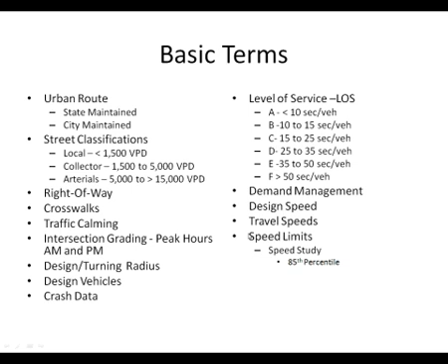You can see a couple of nighttime crashes, a side swipe, and then just rear-end accidents. We look at the predominance of how many accidents we have, what kind of accidents, and then look if there's anything we need to do to this intersection - signals, stop signs, roundabouts, anything along those lines - to try and help reduce the number of crashes and make it safer.

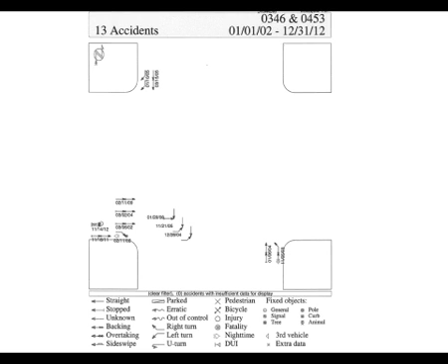This one, we did have a complaint about pedestrian safety. We look at it, there's actually no pedestrian accidents, so we have a hard time saying this is a really dangerous intersection. It may be. We are going to monitor it and see if there are issues out there, but this is the data that's presented to us. This is just a blow up.

If anyone couldn't see that slide before, you're looking at some in 2005, 2004, 2003 - we had a lot of them. And then from then on until 2008, 9, 11, and 12, we only had one each year. So either we did something to the intersection, or we'll have to evaluate it because there was a drop-off, and see why we had that drop-off in the year.

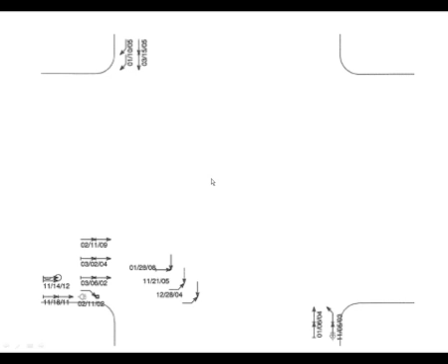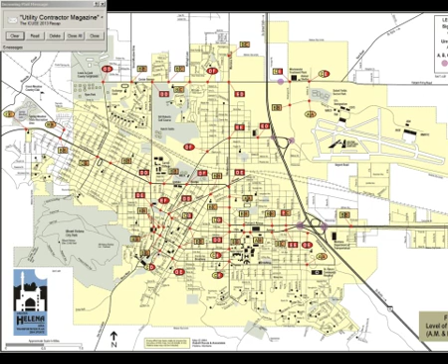This is on the slide - this is the Greater Helena Transportation Plan that I'll talk more about, but this just gives an idea. We have all the intersections, or major intersections, graded to see our overall transportation system. If you're starting to see E's and F's and D's, that means there's over-congestion. We need to do something, because the worse off the intersection is, the more crashes you're going to have, and you're going to have pedestrian problems - you can really have some dangerous intersections when it breaks down. So just looking at, you have the AM peak and the PM peak, that gives an idea of what we're looking at.

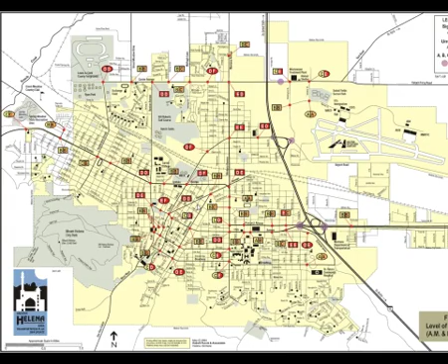One thing that causes a lot of confusion - and the more I'm talking, I want to try and make it as easy and concise as possible so you can get your point across without confusion or wasting time, or getting frustrated because they don't understand what you're trying to portray. So some differences that can cause problems are maintenance and reconstruction.

It's different in MDT versus city or county - I'll go through that. You have studies and design plans. There isn't much confusion on that, but it's more of a timing issue, and timing is a big deal.

Then you have to know about sidewalks, multi-use paths, bike lanes, share the road. Typically when transportation engineers look at it, if there's a multi-use path that's a bike path for pedestrians, we tend not to want bike lanes associated with it because bicyclists can travel on the path.

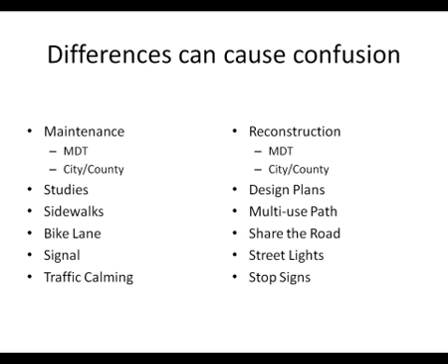We have specific engineering structures we can put out there that will physically make people uncomfortable, which tends to either give more prominence to a pedestrian so they can be seen easier and traffic can calm down, or actually make drivers slow down and change direction.

At this point, that's just a rough overview of what we look at for transportation engineering terms. Is there any questions, or should I go back or do a little more? Any questions that anyone has?

So Ryan, we can go ahead and start with a couple of questions that popped up on the chat window. One question was, can demand management also include biking and walking as well as modes of getting people out of their cars and into different modes of travel?

Oh certainly, yes, that's one that we look at - if we can get people to walk, ride public transportation, or bicycle and commute, that's a huge portion of what we're looking at as far as demand management. If we can get a large enough number off the street and onto walking or biking, that street is going to be viable longer and not break down, so we won't have to do so much reconstruction, and maintenance is prolonged because you don't have the pounding needed from vehicles that keep coming. That is a huge portion, and something we strive to do is get people out of their vehicles just to help with the intersection itself. That's a very large portion of the demand management.

Great, one more question that popped up about level of service, specifically pedestrian and cyclist levels of service. Can you explain, is a pedestrian or cyclist standard equivalent to the automobile measure of level of service?

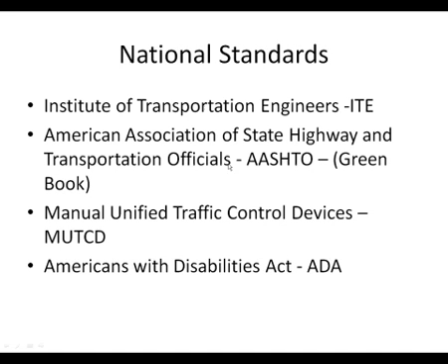So those are set in standard, set in concrete. Those you have to comply with, and they basically trump everything else — stormwater runoff, street trees — ADA is the big overwhelming design standard that is out there.

Then you look into the city, we have some regulations, we have the subdivision regulations. This is one that happened: we had a huge change in the subdivision regulations, not brought forward by staff, but by different organizations that went through our non-motorized committee, the Helena Citizens Council, and then directly to the commission to get sidewalks installed when the streets go in for new subdivisions, not with the building permit as was previously done.

They were waiting until the primary building was built, then they'd add the sidewalks. Well, a new subdivision can go years with the streets in but the lots and buildings not built, so you can have a lack of sidewalks. We had a lot of public comment, an hour in the public hearing on this particular item, and that got changed by the commission.

It's a way to get input. It was the right time to see a global change in when you want sidewalks in, not what type of sidewalk, but that went in with change when you had an organized group that came forward. So that's one where you have seen changes.

The engineering standards, we just updated them right before the subdivision regulations. We implemented complete streets. MTAC, the non-motorized committee, was very vocal in that. The city-county health department, they came in.

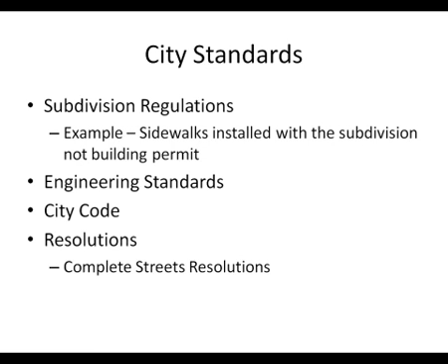We even have a complete streets checklist where you have to check it off - did you at least look at and justify all the different modes of transportation based on the classification of the road? You can use this in your own municipalities. This is where complete streets worked, and the commission was very happy - they can look at it and say okay, it was justified, it wasn't willy-nilly. We had a reason if we didn't incorporate a bike lane, narrower streets, or parking. We looked at everything, and if it doesn't go in, we justify it.

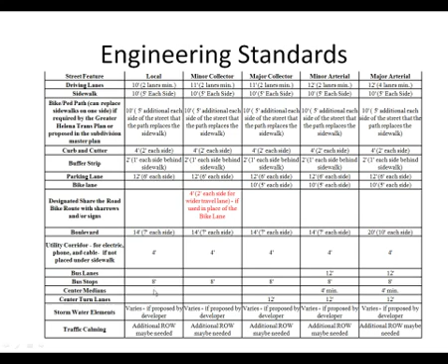This came up in the engineering standards that were proposed. Going through it quickly, staff proposed 10-foot lanes for local and minor arterials and collectors, a little wider based on emergency services input - they wanted 10 feet. Then this is what got adopted: groups came in and petitioned the commission, talked to them during public meetings, and got it changed a foot less - so 9-foot and 10-foot lanes instead of 10 and 11-foot lanes.

So there were a lot of changes, and then they have a deviation for on-street parking. The commission is very willing at this point to remove on-street parking to keep the streets narrower, reduce speeds, and pursue travel demand management by getting rid of some of the cars out there. If they don't have parking, make it better for bikers and walkers to help with demand management. That came in specifically with the engineering standards through public comment, with the commission, with city staff.

That's how you facilitate some of the changes that were out there, and staff is pretty much always willing to look at any of it. I can't speak for everyone, but everyone I've talked to is willing, if it comes in during the design standards process. If you came in and asked for a sidewalk or curb extensions at a particular intersection while we're doing engineering standards, great idea - we'll take it under consideration, but it's bad timing. It's hard to follow up when there isn't a specific project out there, and we're looking at getting public comment for a specific reason.

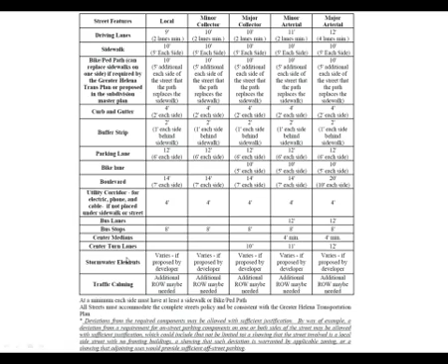Then we have the different studies you have to look at. This is the overall planning of the transportation plan - how you get the existing system to change, getting complete streets incorporated into the existing transportation network, through the Greater Helena Transportation Plan. Then if you want some specific needs, we'll look at some examples.

A neighborhood plan - neighborhoods get organized, saying our traffic's going too fast, we don't have sidewalks, we have pedestrian issues. We have a Winne group that got organized, looking at speed studies - what should we set the speed limit to? If someone comes in and says our traffic's going too fast in front of our house, the first thing we do is look at a speed study. Then we have some traffic plans - this is just in Helena.

Municipalities look at a specific region downtown and what improvements can happen in that area. We did have EPA come in and do a Greening America's Capitals program.

You can start to incorporate and use economics to get stormwater controls, to have better landscaping, to make it more accessible to pedestrians, less friendly to motorized vehicles, to get people out of cars, to get bicyclists to want to go downtown and interact more, and slow the speeds by making it uncomfortable for vehicles.

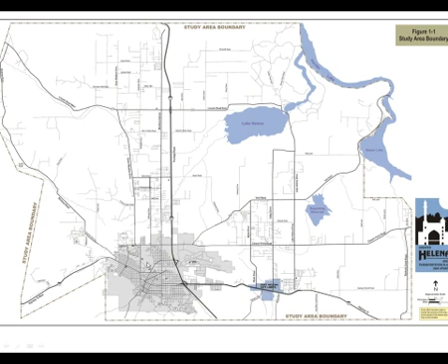The city of Helena is a minor part of it as far as the overall geographical area, but you have the majority of the traffic and everything within the city of Helena. Some of the things that have come in, we have actually adopted into the city of Helena. This is looking at the recommended improvements for vehicles.

The next slide will be the non-motorized section, but we've put in both the interchanges that are out there - this is the Custer interchange, this is the South Helena interchange. We don't have some of the connections in; we are looking at adding another connection. So the majority of the improvements suggested, through city staff and public input, have been incorporated into the city's projects and completed.

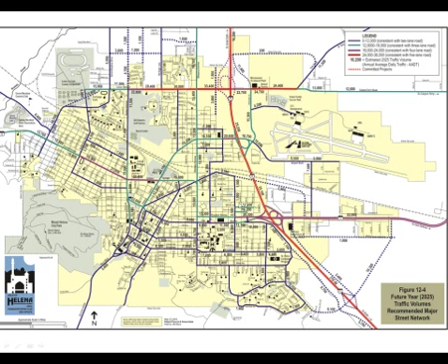Then the next one we looked at is the non-motorized plan. I think with this plan, being through it for 10 years, it needs to be a little more specific. You have all these bike improvements - not saying they aren't needed or warranted, and we're very far behind on pedestrian or bicyclist infrastructure - but there's only 10, 15 non-motorized issues out there that we can prioritize compared to basically the whole town.

It's very hard to get a list when it's just a shotgun approach. Look at what specifically needs to be done to get started in the next 10-year horizon, and that gives city staff an idea to go after it, and it's easier to get a project completed when it's not a blanket approach. That's just my view - try to be very specific on what you want done, but because of this plan, there's the Broadway Tunnel.

You're looking at the Centennial Trail for the city of Helena, but looking at everything around, specifically what do you need as a core group for the overall non-motorized transportation system, and just focus on that. That would be my suggestion.

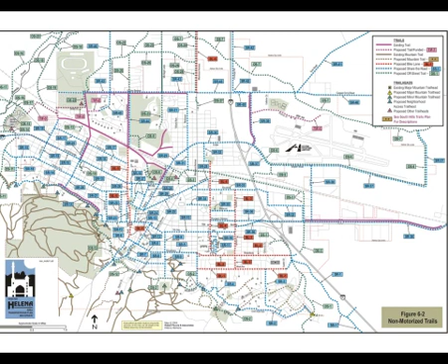That's getting a little late, but for any more questions, go over and talk. Then we can move on to some of the examples I have out there.

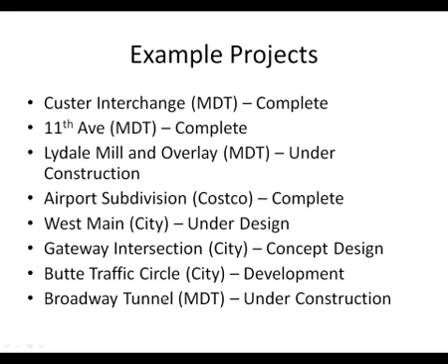The Gateway intersection came in, I have a couple of pictures of that. Then the Broadway Tunnel, first brought up during our transportation plan, which MDT is currently putting in. It's going to be a great connection helping the overall bicycle route.

Winne Traffic Calming was a group, I'll just throw out a few ideas. They came in wanting something to address the overall volumes and speeds of the traveling public. This neighborhood group was very well organized and got something done. The city sat down with them and held several public meetings. However, one thing I'll say is they were unwilling to bring any money forward.

We did put in some speed tables, a minimalistic approach since they weren't willing to do an SID or RID. The speed tables were put in after a year, and we did speed studies before and after. With no other features like sidewalks or narrowing the street section, they showed no real change. The 85th percentile speed was basically 30 before, and 29 afterward, so no real change.

We're looking at trying to do sidewalks on opposite sides to spread the cost out, putting in some raised intersections, and going the whole width of the corridor to try to facilitate slower traffic and maybe reduce some of the volumes.

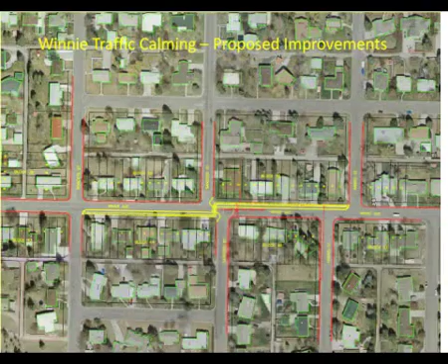However, the neighborhood group wasn't willing to put the money forward, so it just goes back in the priority list. This is where money talks and what you can get facilitated. This is what got put in, and this is what city staff would like to do, but it would have been an RID. These are just temporary ones, and we're looking at removing them. Since these went in, the neighborhood group has disbanded, so we don't have a real good organization, and there were several that started to splinter of maybe not wanting tables in and doing nothing. So to keep it organized, you need a point person.

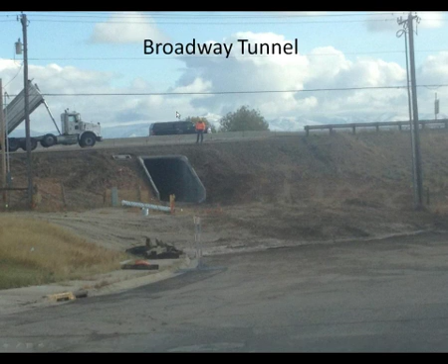This is the Broadway Tunnel, a great project by MDT. It goes underneath the interstate, and it's a dead-end road for the city. It's going to connect several routes that are being developed right now. So as a bicyclist and for the overall biking transportation network, this is going to be a great project that was added as far as the transportation study goes.

So that's the end. Sorry it takes so long, but I'll leave a few minutes for questions.